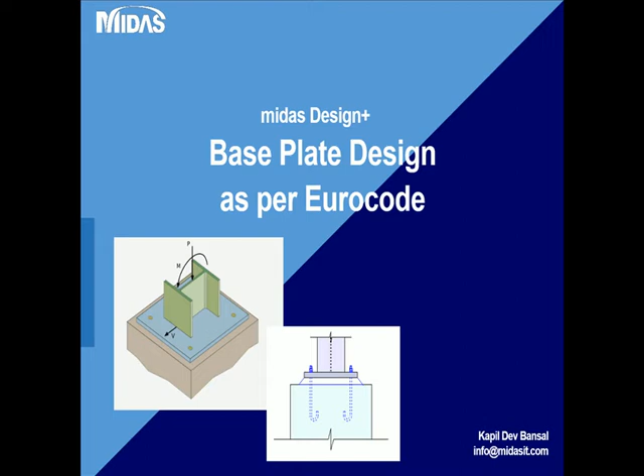Some of you might be new to Midas Design Plus. Before I go into the details of the baseplate design, I would just like to introduce you to Midas Design Plus. Midas Design Plus is a 2D program for unit member design and drafting. Design Plus supports various codes, including Eurocodes and American codes. Since today's discussion is only meant for Eurocodes, I'll just introduce all the Eurocode design modules in Midas Design Plus.

In Midas Design Plus, we have beam design, in which we can perform rectangular and T-shaped beam design. Then we have the column design module. In the column design module, we can perform the design of rectangular, circular, or any general shaped column, including L-shaped and various other shapes.

Design Plus can also perform the design of shear walls, which can be a combined wall, for example, for the lift core wall. Then using Design Plus, we can perform the design of a pad footing. So it can be an isolated pad footing and it can be a strip footing as well. Along with that, Design Plus is capable of performing design for isolated pile caps. So if you want to design a pile cap, you can use Midas Design Plus for easy and quick design.

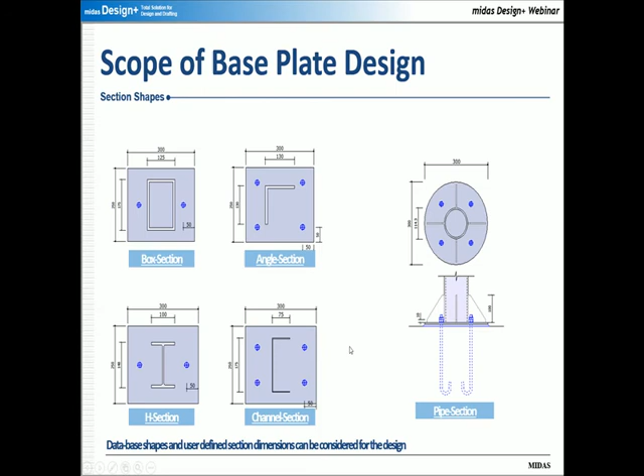And along with that, I would like to mention that even circular pipes can be used for the design of a base plate. So here you can see that we have a circular base plate which is supporting a circular pipe, and various stiffeners are added to support the connection, and the bolts are shown here. So the base plate thickness and the rib plates, everything is shown here. We'll discuss all these configurations in quite detail in the coming slides, and we'll see them in the demonstration as well.

Now, after the shapes, let's talk about the design actions. Midas Design Plus is capable of designing a base plate for axial force, bi-axial moment, and bidirectional shear force. Most of the programs available in the market for base plate design are capable of designing the base plate for axial force and uniaxial moment. So a lot of engineers that I talk to in everyday life have to use spreadsheets for performing the base plate design when there is a biaxial moment and there is a shear force.

By developing Design Plus to include all the design actions, we have tried to solve this problem for the engineers, and this will help them in a rapid design of a base plate with a user-friendly program, and also generate the reports as well as the drawings very quickly. So if you want to design a base plate for any of these section shapes with any of these design actions, including axial force, biaxial moment, and bidirection shear force, you can use Design Plus and you can get the results very quickly.

Another requirement when we are designing a base plate is the stiffener. Usually if the moment is huge and the moment is in one direction only, then we need to add some stiffeners. In order to strengthen our connection without increasing the base plate thickness, we can add the stiffeners here. So for example, here this is a stiffener. There are 4 stiffeners which have been added in this base plate connection, and they will help us to strengthen the connection, and we don't need to increase the base plate thickness that much.

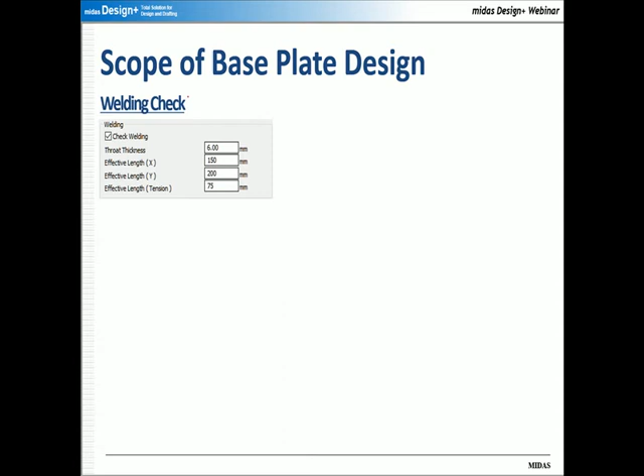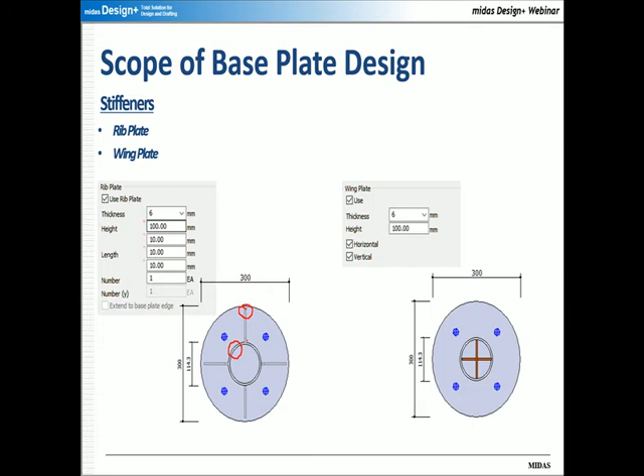Similarly, the base plate design module supports the welding check. Now there will be various instances when the section will be welded to the base plate, and even these rib plates will be welded to the base plate as well as to the section. So Midas Design Plus is capable of performing the welding check for all these connections, and you can specify the material for the welding and the various effective lengths in various directions, and based on your data the program will apply the welding check. We'll see the welding check in more detail in the demonstration and the report that we will generate using Midas Design Plus.

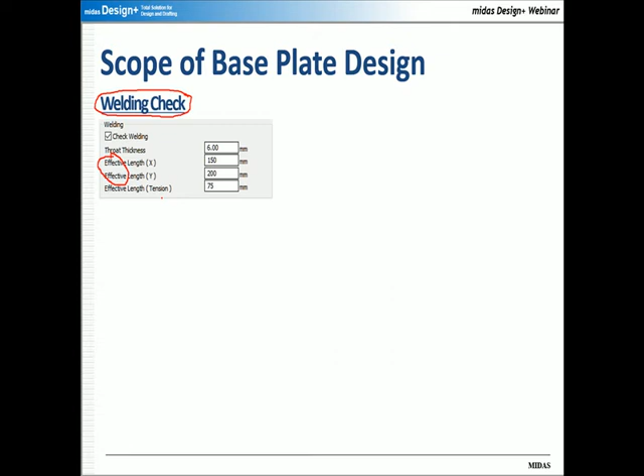Now talking about the mode of input, since Design Plus is a 2D module, it cannot analyze the 3D structure by itself. So what we need to do is import the design forces from various other programs. You can import the forces from programs including Midas Gen, Midas nGen, and even from various other programs like STAAD Pro, ETABS, Tekla Structural Designer, and any of the programs. So let's see what are the various modes of input available.

The first and foremost input mode is the graphic interface. In this interface, you can use the various drop-down boxes. You can specify the material for the plate, for the anchor bolt, for the concrete, and then you can manually specify the axial force, the moment in the X and Y direction, and similarly the shear in X and Y direction. Then you can specify the section shape by this drop-down menu. You can first select the section shape and then specify the database section. And if you don't want a database section, you can just check off this option and specify the dimensions of the section manually here. So this is the graphic-based input where you can input the parameters one by one.

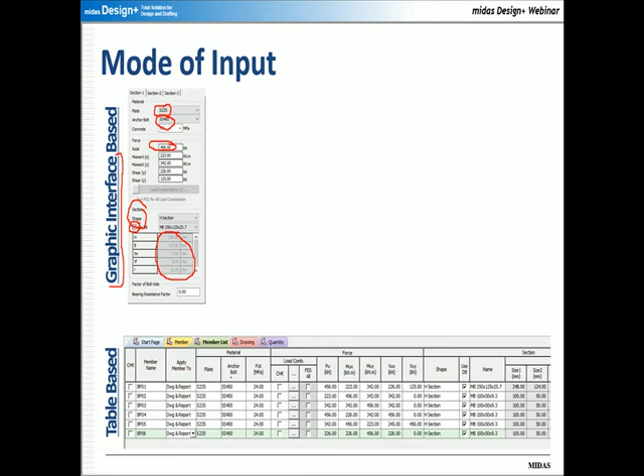The other input available for Design Plus is a table-based input. This is a more general input and it allows you to specify your data more quickly. So here you can see that in an Excel-like table, you can specify the various parameters. For example, if you want to specify the force, you can simply specify it in the form of an Excel table. The advantage of using this Excel format is that you can just copy-paste the data from various other programs into this table, and the program will perform the design and checking for you, and it will eventually generate the drawings for you.

So in this way, you don't need to manually specify the data one by one using the graphic input. You can just create an Excel sheet in the desired format, and then you can copy paste the Excel sheet to this member list tab of Design Plus. So here, if you choose this member list tab, you will get this Excel format. And once you copy paste the data in this Excel format, the program will perform the usual analysis and design for you, and it will generate the drawings as well.

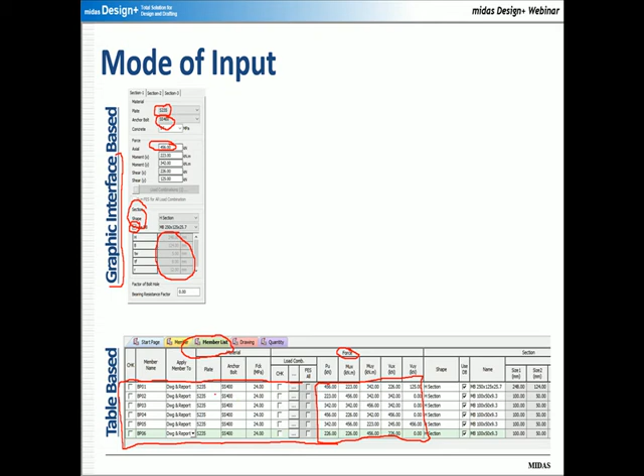Now talking about the modes of operation available in Design Plus. There are two modes of operation in Design Plus. The first is the design mode, the second is the checking mode. In the design mode, you just need to input the design forces and the section shapes. Based on this data, the program will decide the number of bolts and the arrangement of the stiffeners, and even the thickness of the base plate will be decided by Design Plus.

So once you input the design forces and the section shape, the program will optimize your base plate, and it will give you the outputs of the required number of bolts, stiffeners, and the thickness of the base plate. So this can be very easily used by QPs. And for the checkers, there is an option available called checking. In the checking, you need to input all the data: the design forces, section shapes, bolt and stiffener configuration, and even the base plate thickness.

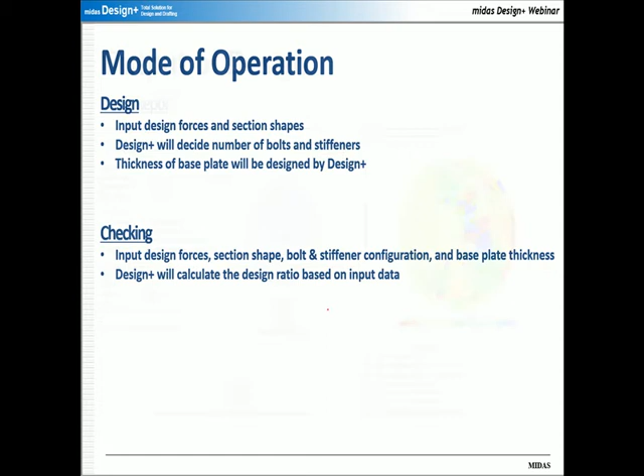Once you're using this checking mode, the program will provide you the design ratio based on the input data. The program will not iterate any of the configurations. It will simply calculate the design ratio based on the configuration specified by you. So both these modes are available in Design Plus. And regarding the check on the anchor bolts for the prying force, we'll see some details in the demonstration part itself. So now let's see what types of outputs can be generated using Design Plus.

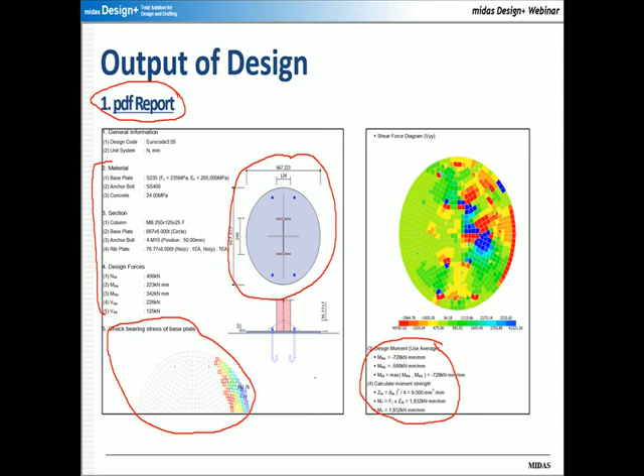So the first and the most widely used output available for the design is the PDF report. In Midas Design Plus, you can generate the PDF report for the various modules. So for the base plate, the PDF report will contain a section diagram, the various result diagrams, the input diagram, and all the equations which have been used from the Eurocode. They will be listed with the section specification. This PDF report can be generated for all the base plates at once.

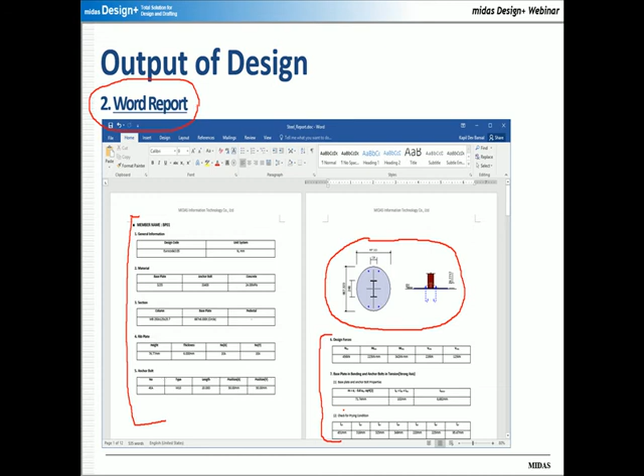And similarly, you have the report in the Word format. Similar to the PDF format, the Word report will contain a section diagram, and it will contain the various inputs based on whether you are performing the design or the checking. Then it will specify the design forces and everything, and it will contain all the equations as per the Eurocode which have been used for the design.

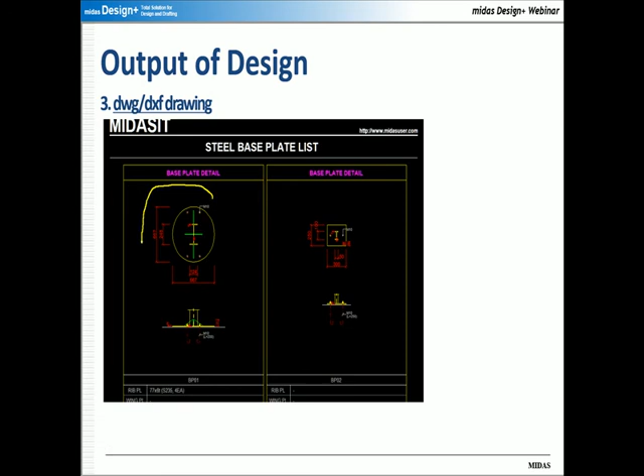Then the last output will be in the form of a DWG or DXF drawing. So once you're using Design Plus, you don't need to spend a lot of effort on performing the base plate design and then drafting it manually. Once you have specified the base plate data, the program will perform the design as well as drafting for you. You can save these drawings as DWG or DXF. You can even customize these drawings before the auto generation, and then directly integrate them with the rest of the structural drawings. So now let's see how we can use this in Design Plus.

So here I'll start the program Design Plus. And we'll see the step-by-step procedure to perform the base plate design. The first step is that I will change the code to the Eurocode, change the material to the Singapore NA, and change the steel code as well to Eurocode. So here you will see the various modules available for the Eurocodes.

And to perform the base plate design, you can go to the steel tab, and in the steel option, you can check this option, click on the base plate and just start the base plate. So now by default, you will be directed to the project mode of Design Plus. There are two other modes available. We'll see in the demonstration what the various modes are and in what situations they are useful. So now I'll change the units to the SI units.

So let's see how we can perform the base plate design as per the Eurocode. So the first thing is that we can select the material for the base plate. You can specify various materials as per the Eurocode, and similarly you can specify the material for the anchor bolts as well. Then if the base plate is placed on a pedestal, then we need to specify the material for the pedestal, and then we can specify the forces.

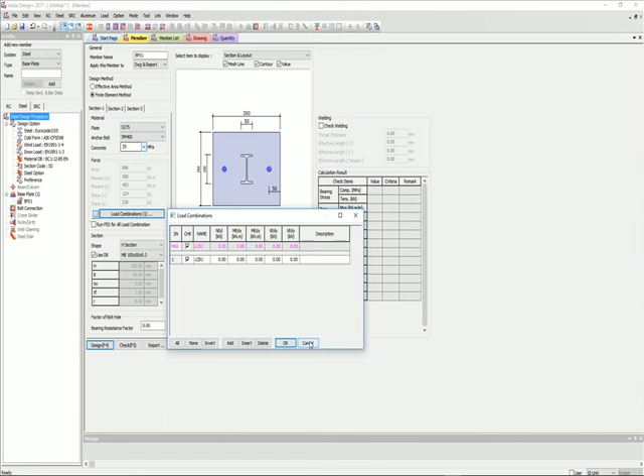So let's specify the axial force, and then let's specify the moment. So if you want to specify this data in terms of the load combination, you can even specify the data in terms of load combination, and the program will perform the design for all the load combinations.

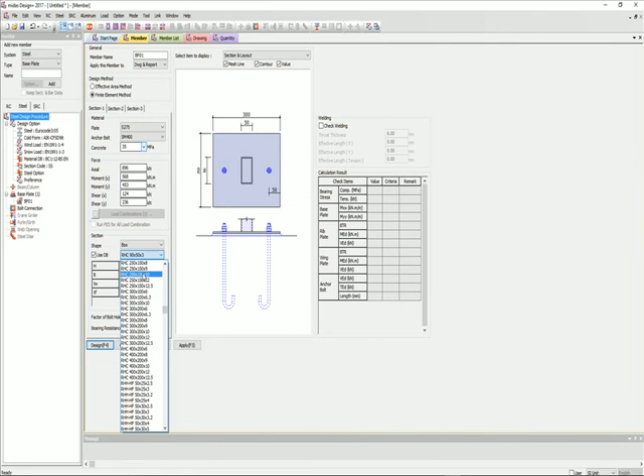And then we can choose the section shape. So for example, for the section shape here, you can see that you can choose the section shape from the database. And if you want to specify the section shape manually, you can just input the section shape and the program will generate the figure based on your input data. So this is quite simple and straightforward, and you can customize the base plate as required by you.

Along with box, you can use the pipe section, and you can use the angle section, and you can use the channel section. So this is similar to what we have seen in the presentation. So once you specify your data regarding the section size, you can specify the welding data. So you can specify the effective lengths to be used in the X and Y direction.

And then if you come to section 2, you can choose the section of the base plate. So let's say if you want to design a circular base plate or you want to design a rectangular base plate, both the options are available. You can mix and match the section and the base plate itself.

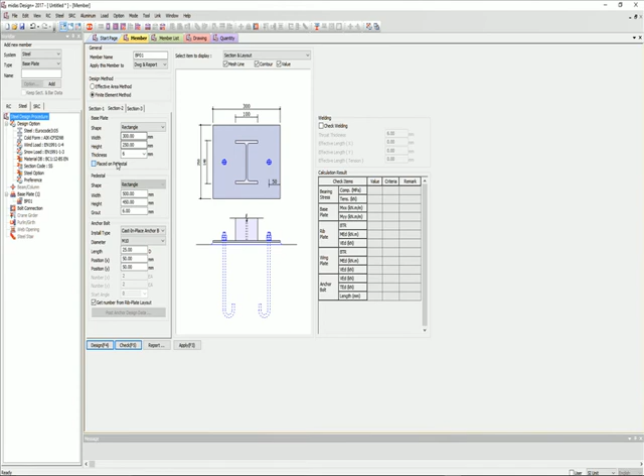Then if the base plate is placed on a pedestal and you want to design the pedestal as well, you can specify the shape. So you can specify the circular or the rectangular pedestal, and then you can specify the dimensions of the pedestal and you can specify the grouting length.

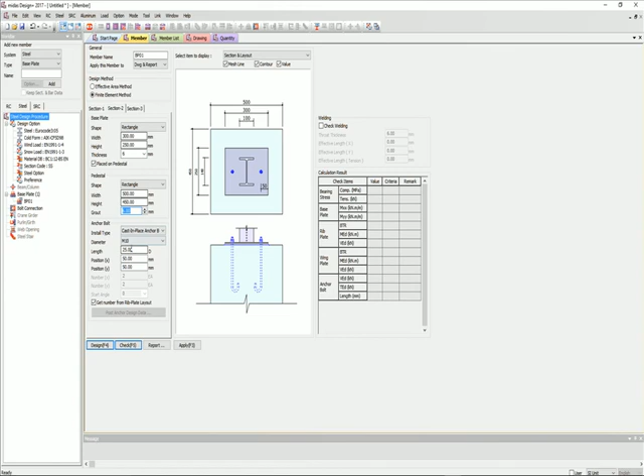And then you can choose the types of the anchor bolt, and then you can choose the diameter of the anchor bolts. So based on your data, the anchor bolts will be generated, and you can specify the lengths of the anchor bolts to be used. And if you want to change their position in X and Y direction, you can even change that. So all this input can be changed.

And in section 3, you can specify if you need the stiffeners. So let's say if you want to specify the stiffeners, you can specify them using this format. And in case you want to specify the wing plate, you can even specify the wing plate for use in the base plate. So this is the procedure for performing the base plate design.

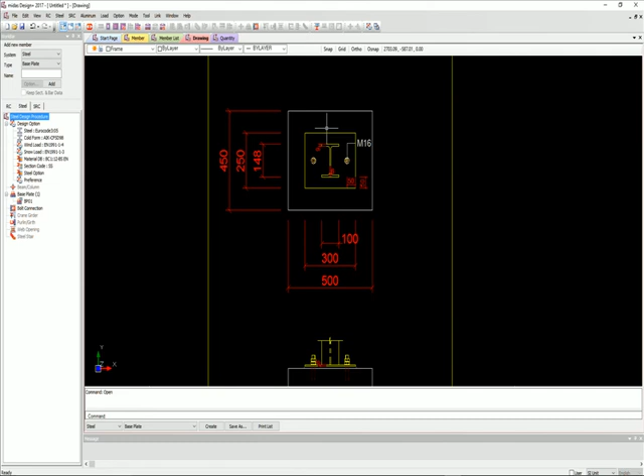And once you're done with that, you can just click on checking. So both the options are available. You can go for checking and you can even go for the design. So here you can see that once you perform the checking, the program is giving you the design ratios in the form of a table. And if you want to see the drawings, you can just go to the drawing tab and you can click on create. So the program will generate the drawing for you once you have specified the data.

And if you want to do this in the spreadsheet format, you can just move to this member list tab, and there you can specify the forces, the section, and everything in a table based format, and you can perform the complete design and drafting using this table format itself.

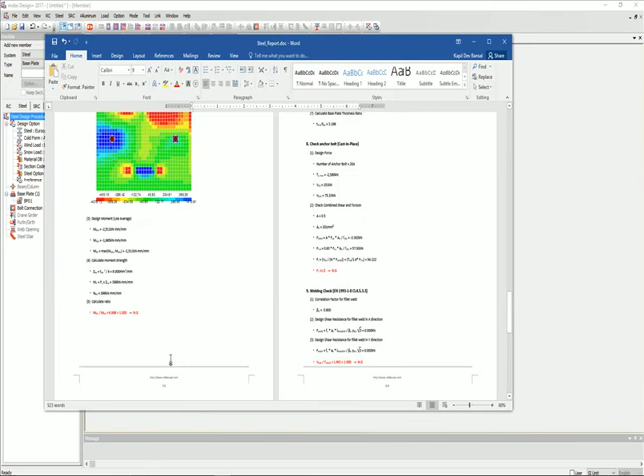So once you're done with that, you can click on the report and you can click on the detail. The program will generate a Word report for the base plate design. You can save this Word report, you can print this Word report, and you can use it in any manner. So now we'll switch to the simple mode and we'll see what options are available in the simple mode.

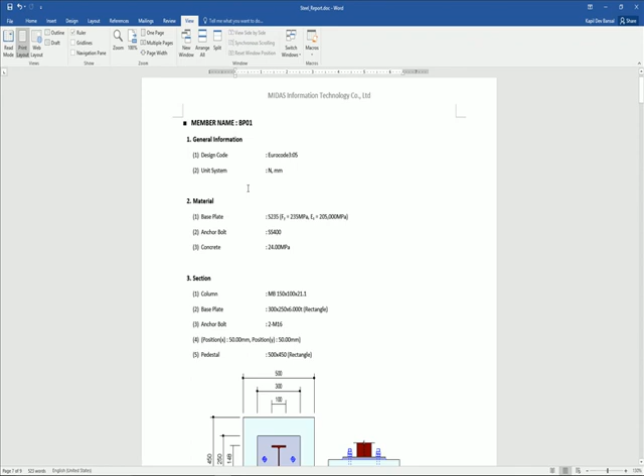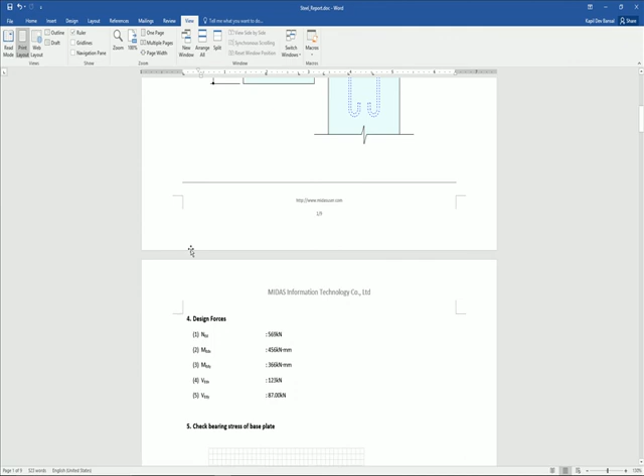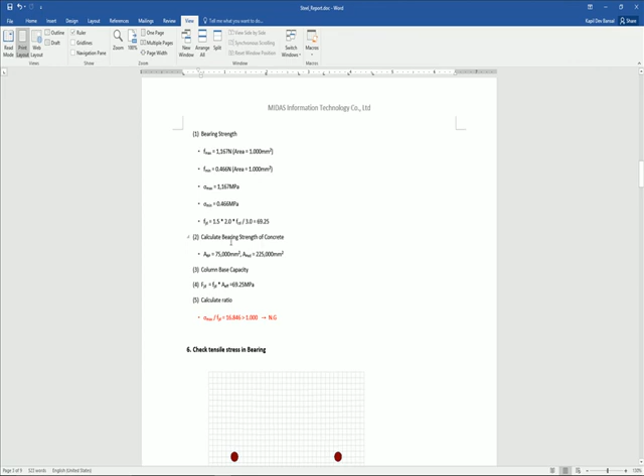So now if I take you through this Word report for the design, you will see that the first data is about the input. So what is the code used and what is the material used for the base plate and what are the various sections used for the base plate. And there will be a figure of the base plate, then about the design forces, then the bearing stress on the base plate, and then the tensile forces, and then the base plate checking.

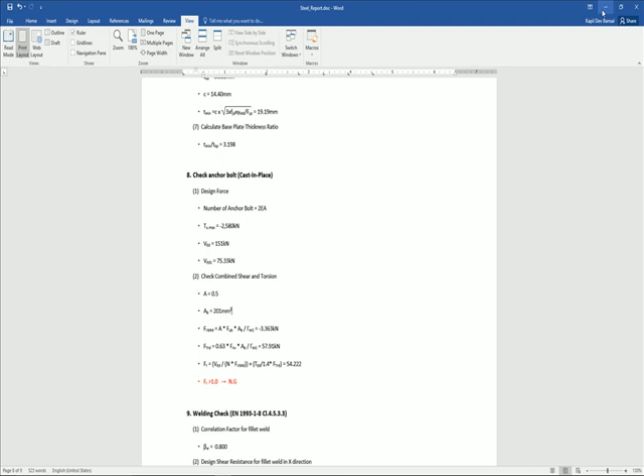So the program will contain the entire information about the shear force and the anchor bolts, and even the welding check will be there. So using the base plates, the program will perform the checking on the anchor bolts as well. So all the equations as per the Eurocode will be checked, and it will also be checked for the combined shear and torsion forces. So the program will list all the equations used for that purpose, and you can quickly refer to them for the check. You can use this report.

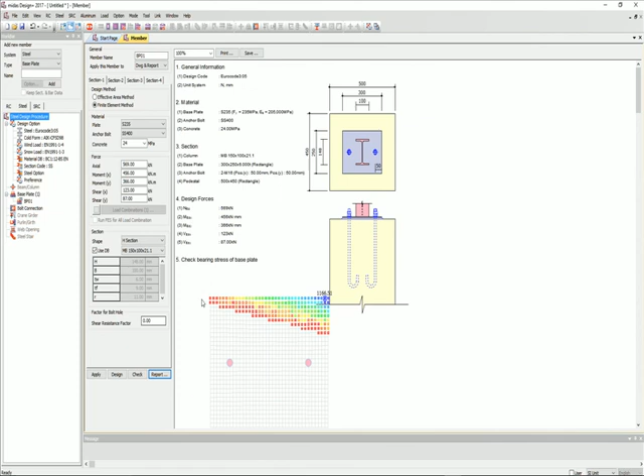Now let's switch to the simple mode and see what the various options are and the various advantages of using the simple mode. So here in simple mode, we can click on checking, and for the report, we can quickly click on report and choose the option of generating a detail, a summary, or an input list. Here you can maximize or magnify the size of the text.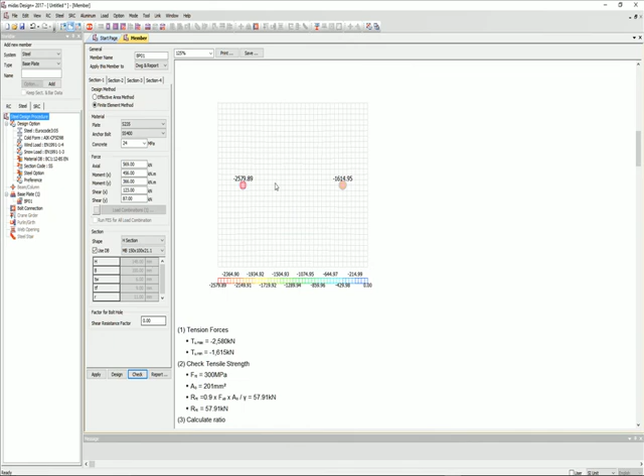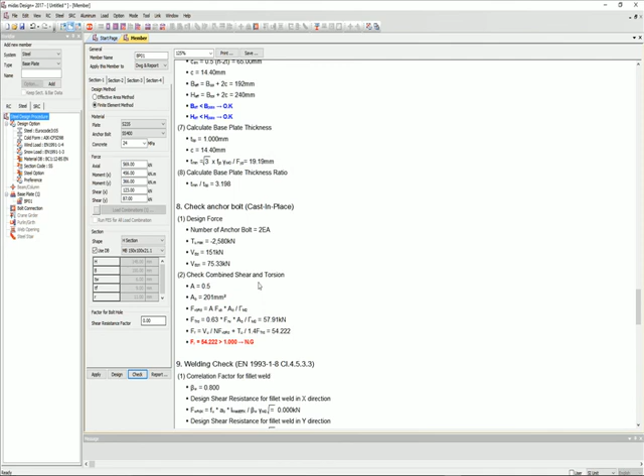So here you will see that this is the PDF report, and the program is giving you the entire information about the tension stress of the anchor bolt and the tension forces and the tensile strength check. All the equations as per code are listed. And then the FEM analysis of the base plate. The various diagrams are included for the shear force. And the program is checking the entire moment strength based on the Eurocode. And similarly for the anchor bolts the checks will be applied, and for the welding as well. So this is how we can use it.

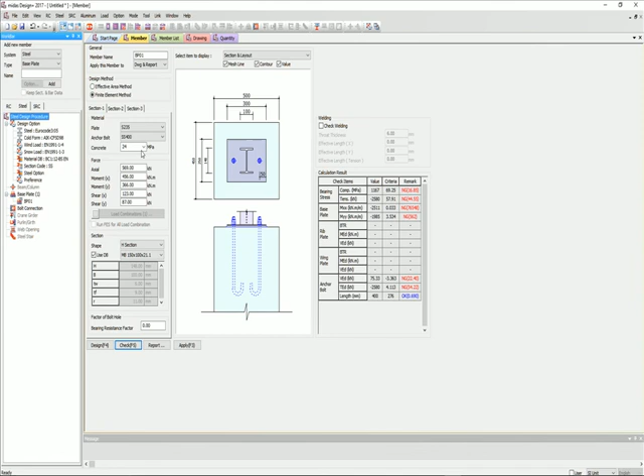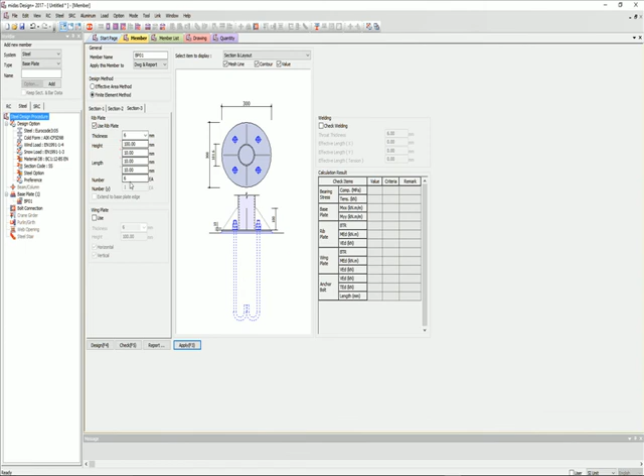Now let's try to perform the design for a circular base plate which is supporting a pipe section. So for that we can move to the project mode again, or we can specify it in the simple mode itself. So now here I'll specify a pipe section with some particular data, which is not placed on a pedestal, but the section for the base plate will be a circular section. And here we'll use some stiffeners. So we have specified the stiffeners. The thickness of the stiffeners can also be specified. And once we do that, we can even specify the bolts if we want to. So here you can change the number of bolts if you want.

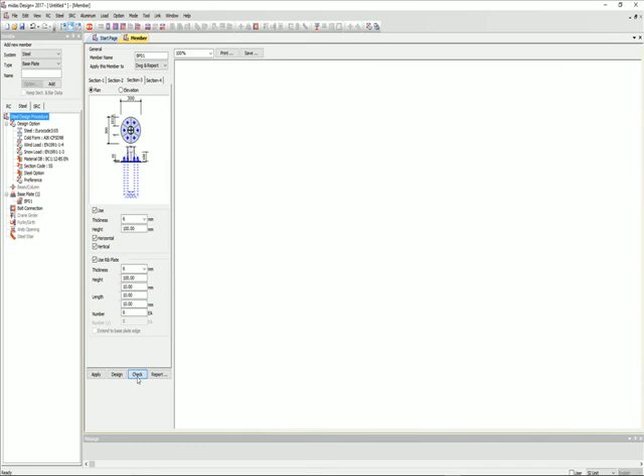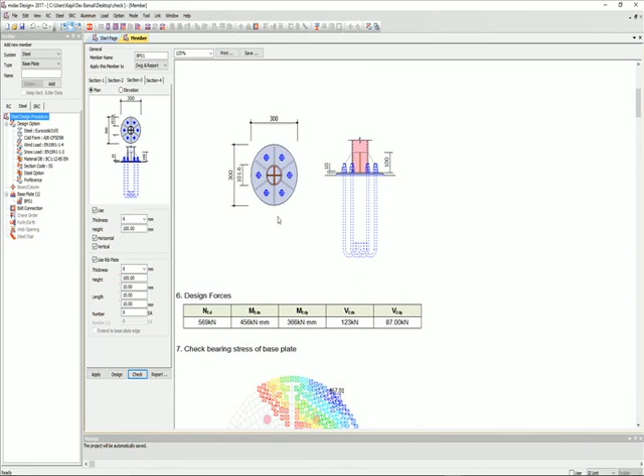So here you will see that we can specify the number of bolts that we want, and if you want to increase the number of bolts, you can just specify it here and then click on checking, and the program will perform the check for you. So for the circular base plates, I'll save this, and for the circular base plates we can perform the design. So here you can see that we have used the various stiffeners and the bolt data is specified, and this is all included in the report.

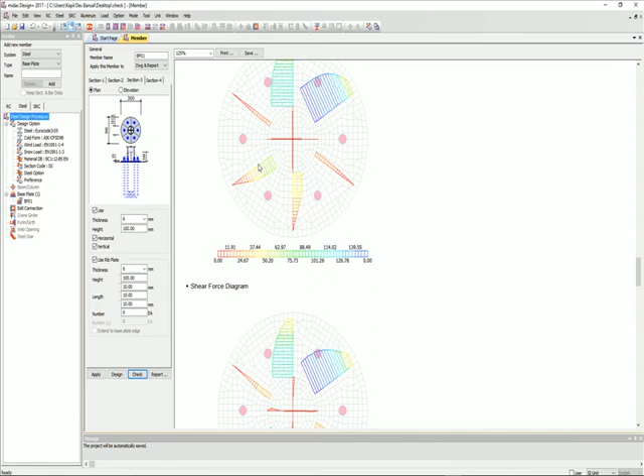And similarly the shear force diagram and the moment diagram are included. And even for the rib plate, you will see that the moment diagrams are included. In this particular base plate, we have 6 rib plates. So all the 6 moment diagrams and the shear force diagram are included in the list. And all the checks are listed in this particular report. So we can print this report in this format.

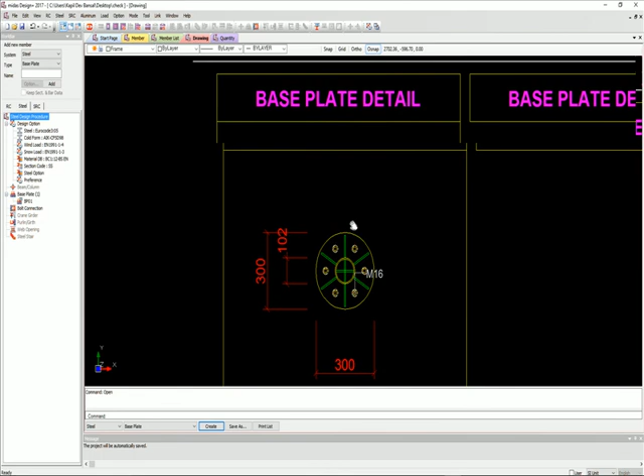And if you want to generate the drawing, you can simply go to the drawing tab and click on create, and it will generate the drawing for you. Let me retry it. So first I should change it to steel base plate and then click on create. So the program will generate this drawing for you, which you can save as DWG or DXF. So once you generate the drawing, all the information will be listed here, including the thickness.

And once you generate this drawing, you can save it by clicking on save as, and you can choose a format to be saved. You can use either DWG, DXF, and even other options like JPG, BMP, PNG. They are available for saving the drawing. So this was about the Eurocode base plate design in Midas Design Plus.